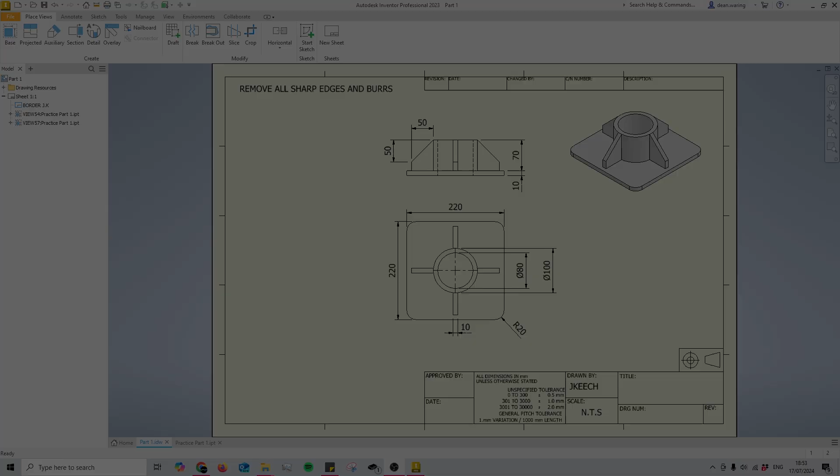Today we're going to be doing what I like to call a practice part, and as you can see on the screen, this is the part that we will be practicing making. So before we even start this video, pause it, take a screenshot of this, then open it up on a different monitor if you've got one available, or just open it in a different tab, and then you can take from this drawing and build the model.

Now the reason that we're doing a practice part is so that we can learn to use the different tools we have available to us, and also get a better idea of what is possible in Autodesk Inventor.

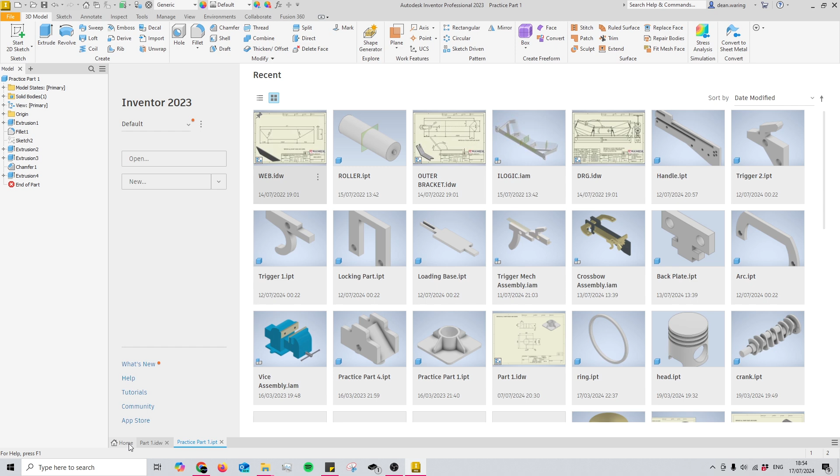Anyway, let's jump in and start modeling this. What I'm going to do is open up this part as a PDF on my other screen, that way I don't have to keep checking between them.

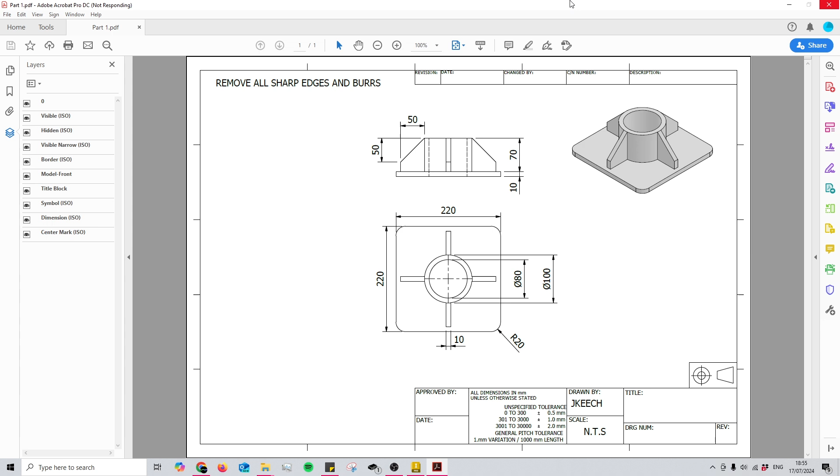To begin with, I'm going to start a brand new part in millimeters, and then take a look at my drawings here. We're going to begin by making this base plate on the bottom, and you'll see that it's 220 by 220 with a 20mm fillet or radius on the side, and it's 10mm thick.

So to begin with, I'll start my 2D sketch on this plane, since that'll be the bottom of it, and then I'm going to draw in my rectangle at 220 by 220.

Once I've put in the overall size of it, I'm going to create a dimension from this datum point, the yellow dot, and then select my dimension and divide it by 2. That way it's now centered along that point, and the same for the other side, exactly the same again. Now it's completely centered along our point here.

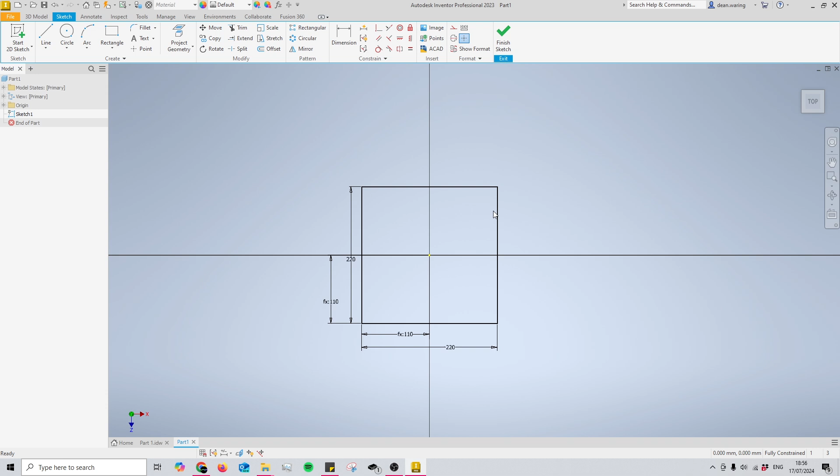Now we need to do the 20mm radius, and we're just going to do that with the fillet tool and then select all of our corners like so. Now that is our base plate sketch ready to go, and now we just need to extrude it by the 10mm as I mentioned before. So that's a good start.

The next part that we're going to be doing is this circular part in the middle, and that is an 80 and 100 diameter inner and outer hole, and that comes up by 70.

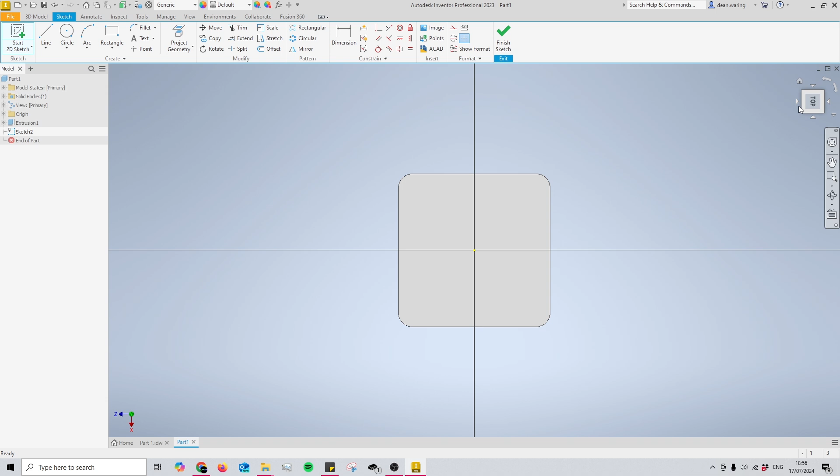Once again, I'm going to start my sketch on top of the face, and then I'll start with my circle tool with the 80mm inner diameter and then the 100mm outer diameter, and I'll extrude this by a total of 70mm.

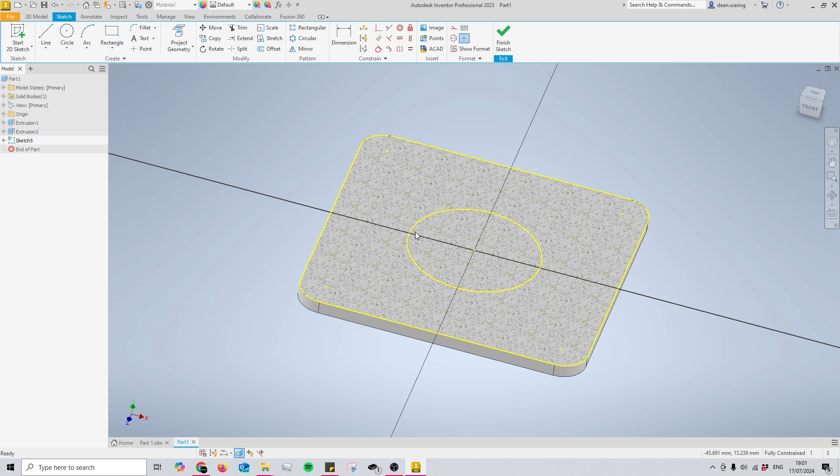To begin doing the webbing, I'm going to start a sketch on our base right here, and then I'm going to project the geometry. That way, if you press F7, you'll see that it cuts down to the place that we're doing a sketch, and you'll see that once I've projected the geometry, a yellow circle has been put in its place.

What we're going to be doing is creating a 10mm thick piece of webbing, and we want that to be central to our midpoint here, and we're just going to do that the same way as we did before. And then we also want to make sure that it is 50mm away from the edge of our circle.

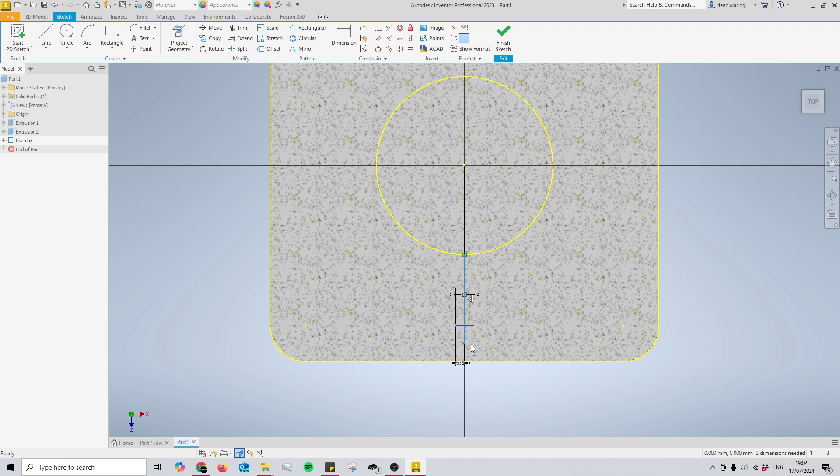So you could do it that way and then line it up, or an even better way that I prefer is we're going to put in our center lines right here, and these will also double up as mirror lines down the line. So now I'm going to highlight these two lines and turn them into construction lines. That way when we use our 3D model tools at the top, it doesn't interact when we're extruding or revolving, whereas your normal lines will.

Also make sure that when you're using the construction line tool to unselect it or reselect it when you want. I find I might be using it and then carry on drawing, and a lot of my lines come in as construction lines because it's a toggleable tool and will stay on if you're not aware of it. Anyway, I need to make sure this line is 50mm away from the edge of our circle, so I'm selecting the edge of our mirror line, or our construction line, and dimensioning it 50mm away.

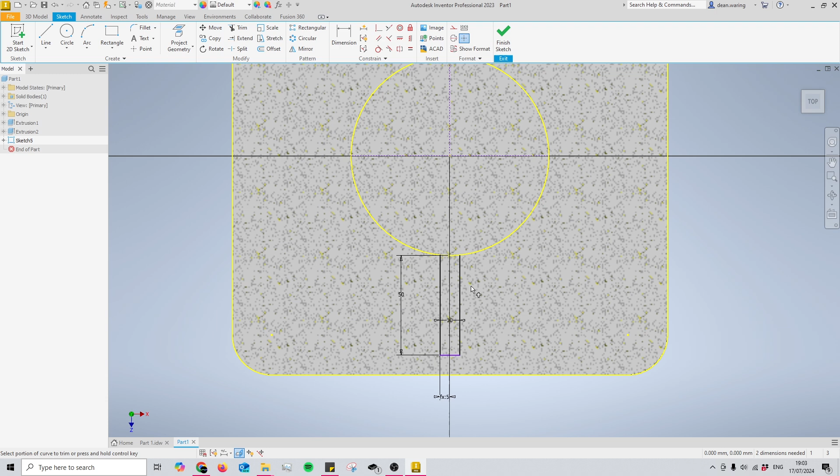Then I'm just going to start drawing in our straight uprights, and we're going to extend them straight into the circle, and the shortcut for doing that is holding shift and then pressing X. Now you'll have your trim tool out and you're able to trim geometry, but if you hold it down you get the extend tool, so it's sort of like a 2-in-1 shortcut.

Anyway, that's one side of it done. What I'm going to do is exactly the same thing again on the horizontal axis, and like I said before, just going to run through and do it exactly the same.

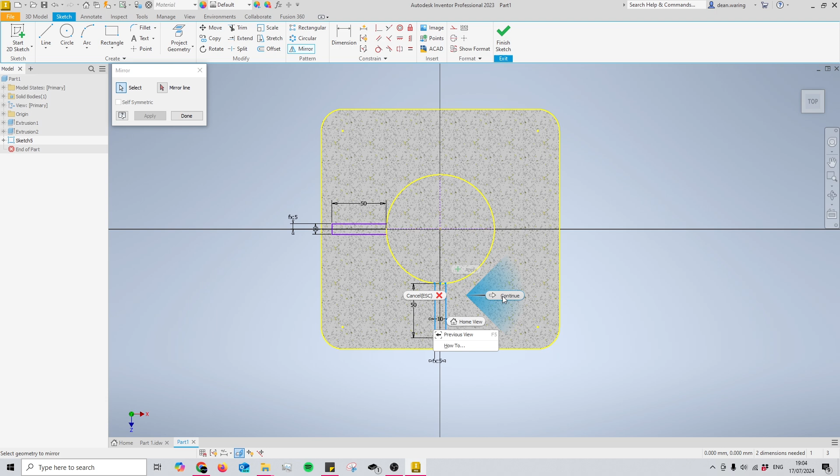So now that we have one that's going to the left or right and then one that's on the top or the bottom, we can use the mirror tool to highlight our bottom bit, and mirror it about our center line here, and then do the same thing again on the opposite axis, and now you'll see that we have all of our available profiles ready to be extruded.

So run around your part with the extrude tool and select all your profiles and make sure that it comes up to 70 so that it's in line with our circular piece. And now we're getting somewhere. It's starting to look like our part.

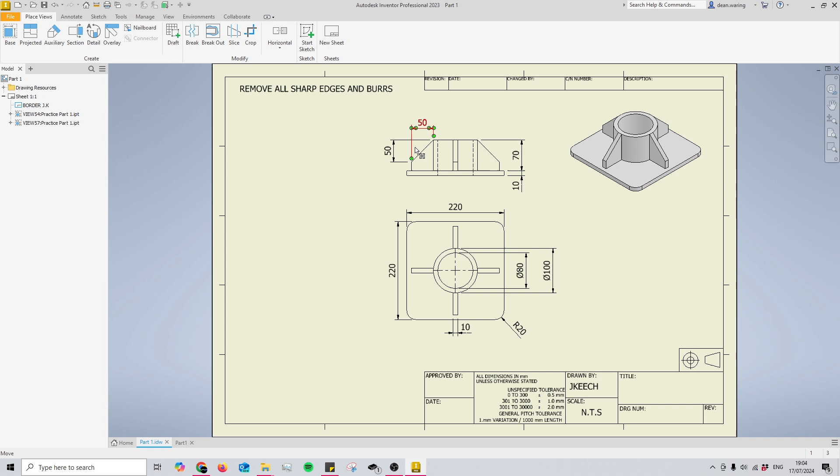Lastly, but not leastly, what we need to do is add a chamfer, and this is a very simple 50 by 50 chamfer. Now you could start a sketch on the side of it and draw it in, much like we have been doing, or we could do it a lot quicker with the chamfer tool up here, and then change the distance to 50 mil.

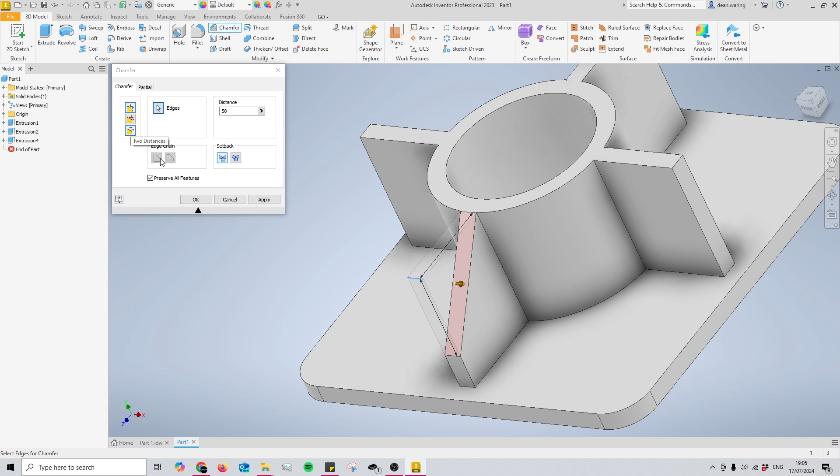This will automatically create a chamfer at 50 mil down and 50 mil across. This can be changed with our different angles and 2-distance chamfer tools, but this one will do for now. I do encourage you to mess around with that if that's something you're trying to learn. But once we've applied it to our 4 corners, you'll see that we're done, and this is our part.

So yeah, hopefully you learned something here. Even if you didn't, you got to practice what you already knew.